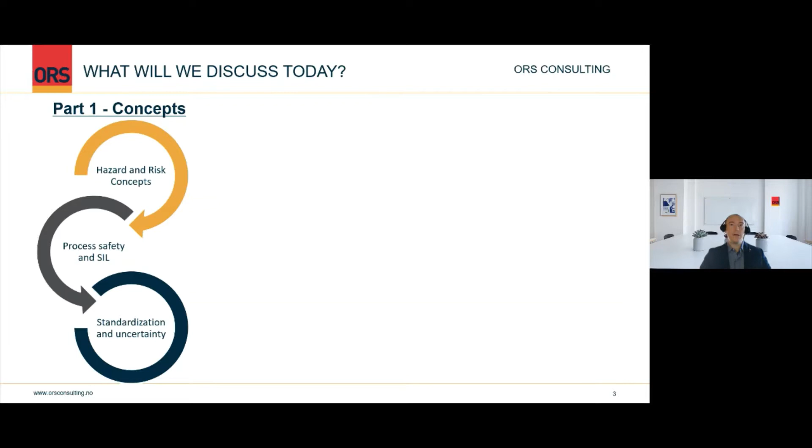First, I'll give you a short introduction about what we will discuss today. We've split our presentation into two parts, where the first part is a brief introduction to the concepts and foundations that our second part is based upon. It's important that we give you a short introduction to hazard and risk concepts, process safety and SIL, and standardization and uncertainty as we understand it, before we go into part two, which covers some of our viewpoints regarding process safety and SIL. As you probably know, process safety and SIL are very wide fields, so it's not our intention to discuss very detailed aspects, but rather present an informal overview of some important aspects to keep in mind when working in these areas.

Hopefully the majority of these concepts will most likely be known to or implicitly understood by most of you already, but we still hope that what we present today might at least inspire some thought and discussion.

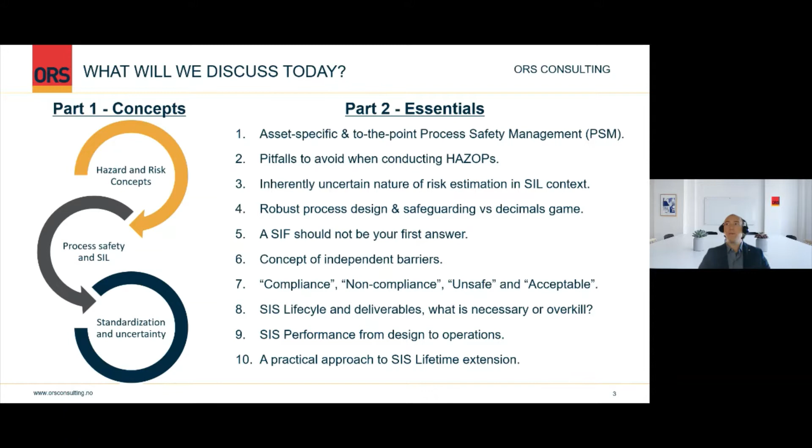So the first introduction is to risk and hazard concepts. As you probably all know, a hazard is a situation that poses a level of threat to life, environment, or asset. We're here talking about hazard and risk from an engineering and asset operational viewpoint, where risks and hazards are related to events of a certain magnitude, and risk is something you want to minimize as much as possible before you start to manage the residual risk.

A risk is defined as the probability that a hazard will turn into an accident. The traditional way of describing risk is you have a hazard with a certain consequence, combined with the probability of that event happening. This is a bit limiting for the ability to understand, administer, and manage activities and assets, because there is an important aspect related to this, which is the associated uncertainty.

All your analyses are based on certain assumptions and inputs, and if you don't understand the uncertainty related to these assumptions, your risk picture will not be correct. Based on that, we think risk should be defined as the consequences of an activity combined with the associated uncertainty of that. Another important aspect to understand is that risk can be reduced or managed, but you cannot eliminate it totally.

You'll always have some residual risk.

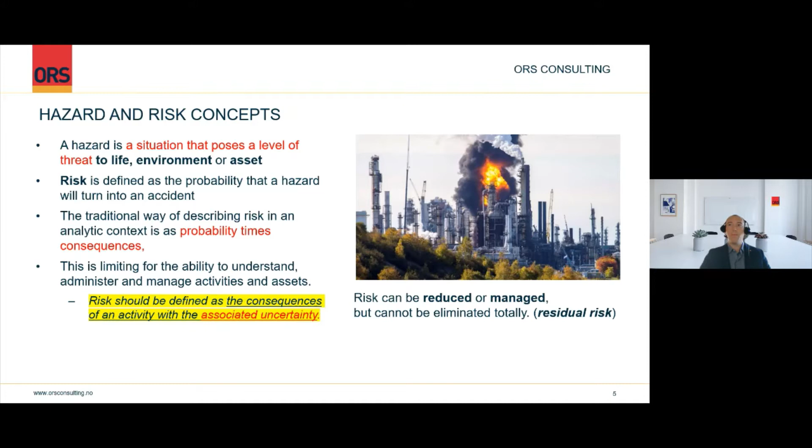So I would like to continue on the topic of managing technical and industrial risk. On a very high level and basic introductory level, we are talking about three pillars of industrial and technical risk management. To start with, we are talking about safety barriers for a process facility and a safety critical complex facility. You need to have your safety barriers in place. This is rule number one, and this is not open to discussion. For safe and reliable asset operations, you need to have your barriers.

On top of that, you will have to exercise whatever you can within the area of probabilistic assessments. You need to use data, methods, statistical tools, and other things to understand what hazards are credible and what hazards are not credible for the asset in question. This is to complement the barrier configuration. One of the key things to remember is that the probabilistic aspects are not used to eliminate robust safety barriers. It is rather in place to understand what is necessary in addition to make these barriers even more robust for safe operations. So it is very important to understand the probabilistic aspects together with the barriers.

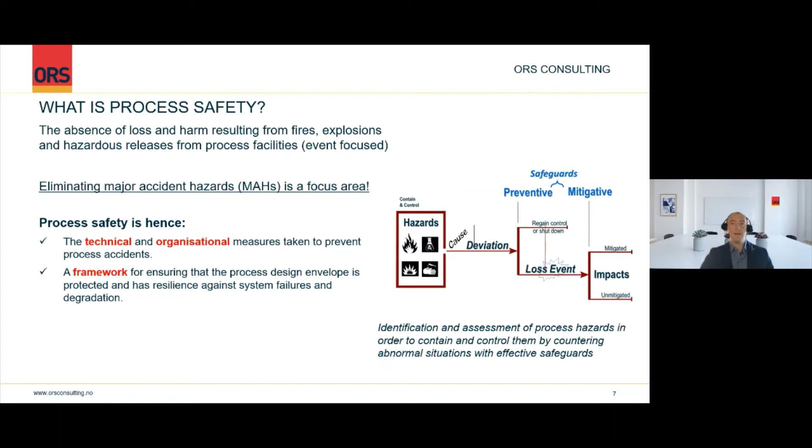This brings us to the first key principle of process safety, which is that no single failure, either operational or equipment related, shall lead to any unacceptable hazardous situations for either personnel, environment, or asset.

As Baris mentioned earlier, there is a barrier versus probability approach to safety. But in process safety, these approaches need to be combined because you can't design a 100% foolproof design. You need to use some engineering judgment to actually assess the probability aspect of how likely is a hazard or how likely is a consequence.

But based on this combination of probabilistic and prescriptive risk assessment, there are some important principles from high-risk industries that are important within process safety. Namely that barriers against process hazard shall be independent of and in addition to the control system. So this leads to the no single failure principle, that if you have a failure in your control system, you should have an independent barrier, so you don't have one single failure leading to a loss event.

And the other important aspect from these high-risk industries is that there should be 2 levels of protection against any process hazard. It's not sufficient with one barrier. You should have 2 levels of protection that shall be independent of each other and preferably of different technology. This adds robustness to the design.

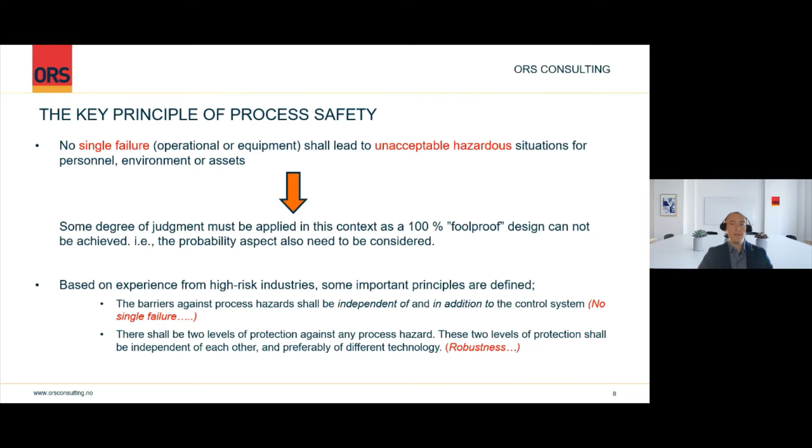So the framework for a process safety management system is founded on the general laws and more specific regulations that are relevant for the location of your asset or your operation. In addition, there are standards made by various entities that ensure that best practice is formalized. So this is kind of the framework that you are supposed to make your process safety management system within: the laws, regulations, and the best practice standards.

Within this framework, an evolving process safety management system should go from a pure standards-based approach, where you blindly implement the standards without fully analyzing or understanding the context of why you designed it this way, to a more compliance-based system where the context is understood based on your facility being custom-made and complex, with its own operating envelope and its own specific hazards.

Of course, a good process safety management system needs to take into account both the asset operational and asset lifetime related aspects, and hence you need to ensure that you have continuous improvement based on both operational experience from your own plant and operational experience from similar plants within the industry.

But finally, as we have discussed, there is this probabilistic aspect to take into account. So a good process safety management system needs to be based on the actual risks that you have on your site. And the question should always be, how can I better manage the inherent risks and ensure that they are as low as reasonably practicable?

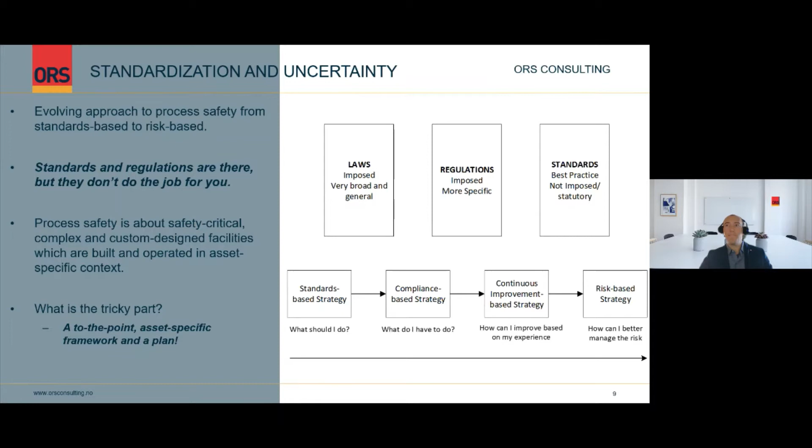Thank you, Thomas. So, it will be interesting to discuss the SIL part and the functional safety part. Now that you have explained the process safety definition and the fundamental principles, the next question is, where does the SIL functional safety fit into this picture?

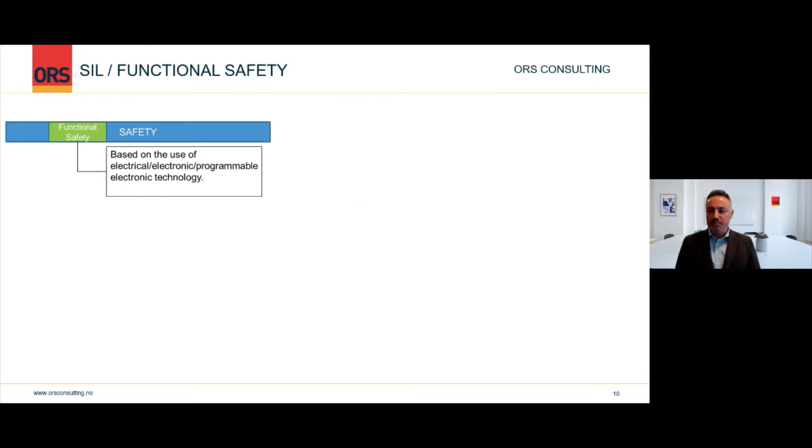So basically, in the process safety context, it is fair to consider that SIL is a subset part of process safety, which is based on electrical, electronic, and programmable technology. So we are talking about safety instrumented functions.

Remember, we refer to a function which consists of a sensor, for instance, a switch or a transmitter, and it consists of a logic solver, for instance, a PLC or a hardwired system, and it will consist of a final element. To give you an example, it could be a shutdown valve. So these functions, safety instrumented functions, they are a part of process safety.

And from now on, so when we discuss process safety, please remember that it also includes the safety instrumented functions.

So the theory about it and how it is going to be done, it is all established. I think in the last 15-20 years, we have seen that the different process industries and other industries have learned how to deal with SIL things. But these are very broad standards. For instance, when we talk about IEC standards, there are thousands of things to comply with, especially IEC 61508, which is the generic standard.

It refers to IEC 61511. It is the process industry guidance for the standard. So it is not very easy to understand what is a suitable level of working for you and your asset.

And for this kind of functions, we are talking about 4 SIL levels. So SIL 1, 2, 3, and 4, with 4 being the highest SIL level, but it is like next to impossible to see SIL 4 functions in the process industry. To illustrate for you, for instance, if you go to a medium-sized or a large process facility, you're gonna see that based on a thorough assessment, the majority of functions will be either no SIL rated or SIL 1.

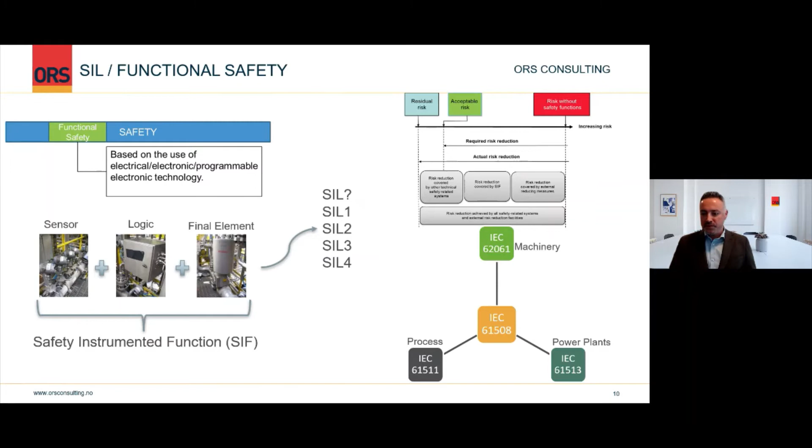So once again, we refer to process safety together with SIL from now on in this webinar. This completes the first part with the introduction to process safety and SIL basic concepts. I would like to continue with the second part, where Thomas and I will share our experiences with some essentials.

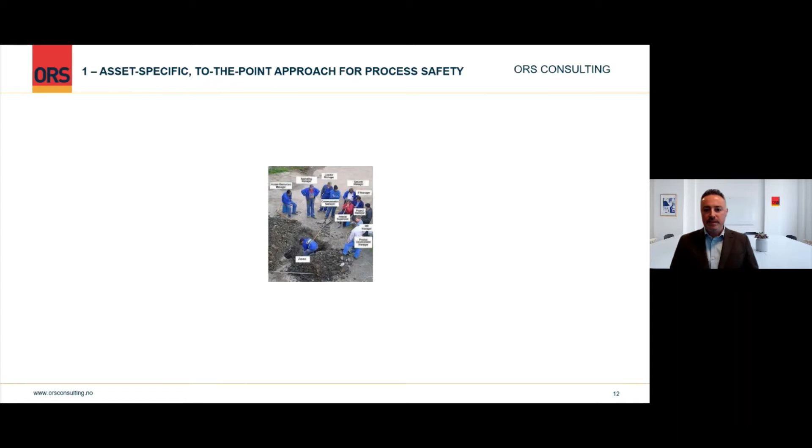The first one will be about process safety management, PSM, and this is once again our experience. Process facilities and assets are very attractive targets for mergers and acquisitions. We are talking about a steady stream of mergers, acquisitions, and divestments, and it causes reorganizations for these kinds of safety-critical assets.

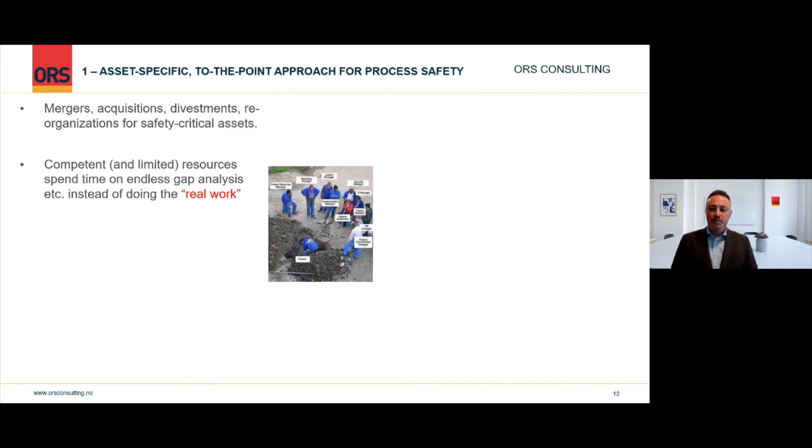What happens is that very competent but limited-in-number resources spend time on endless gap analysis, etc., instead of doing the real work, as we hear it on the site when we talk to our clients. On top of that, there are a set of other initiatives which create extra workload and distraction.

What we see is that as a risk driver for process assets and operations, lack of competence is the biggest risk driver. It is not the design, it is a lack of competence to operate. Lack of continuity due to mergers, reorganizations, and other things, and also procrastination, reluctance to implement complex process safety systems imposed by central organizations, is one of the biggest risk drivers.

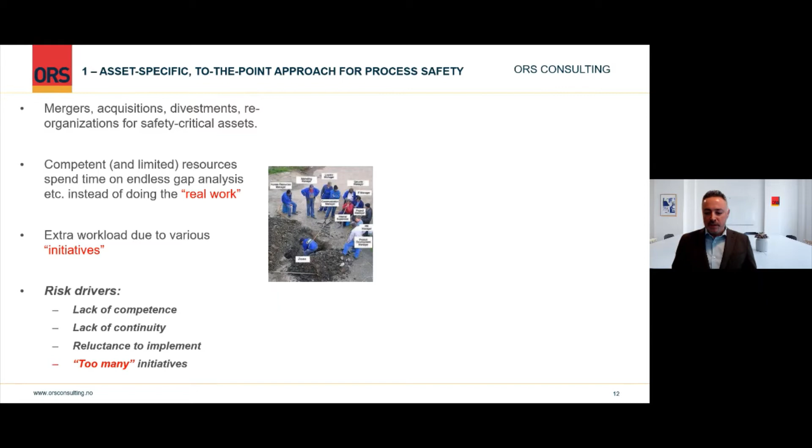It is so complex that the asset organization doesn't even bother starting. It's also worth mentioning that too many initiatives is one of the biggest risk drivers. There are so many initiatives, people don't have time, they don't even want to hear about it, so they just let it be. So what is the key point here?

Based on our experience, I think there is big value in considering the process safety management framework in a decentralized way. For instance, if there is a process asset somewhere in Europe, owned by a multinational somewhere in the United States, having a specific, to-the-point PSM framework for this asset, without gap analysis done from the central organization, would be a huge benefit so the organization isn't distracted.

Also, this asset-specific PSM framework must be very simple, extremely simple, so that you reduce the threshold for the asset organization to do something.

Another thing is the lack of continuity. We hear about reorganizations and other things, but when it comes to process safety, continuity is a must, because we are talking about assets with over 20-30,000 functional locations and components, many very complex systems. It takes many years to understand what systems we are talking about.

Process safety is not something like a learning-by-doing sport - you can't just say, 'Hey John, can you come over here and look at the compressor systems and process safeguarding?' You need to respect the people who spend 20 years understanding it, and motivate them so they can do the work. I think it is very important to think about this.

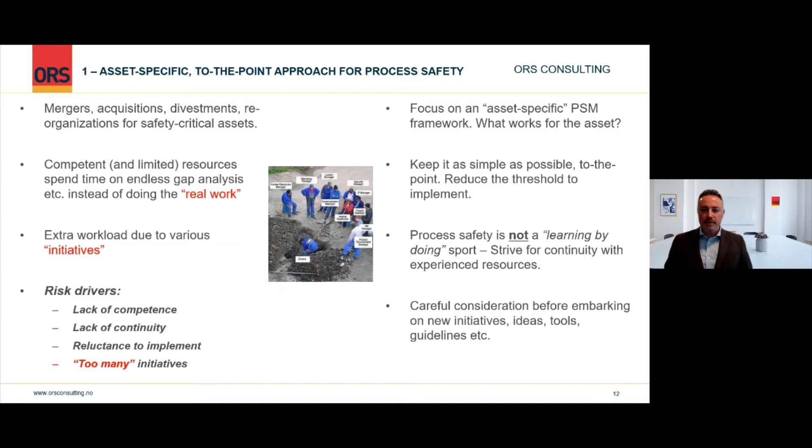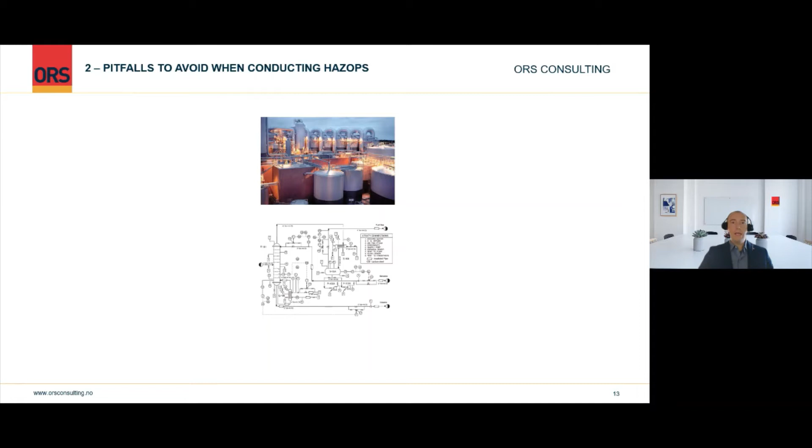Thank you, Baris. So the first step after you have a process management system in place is to identify the hazards that you have in your plant. One of the most important and well-known methods to identify process hazard analysis or process hazards is, of course, a hazard and operability analysis, which is maybe the most widely used method to identify hazards within a process design.

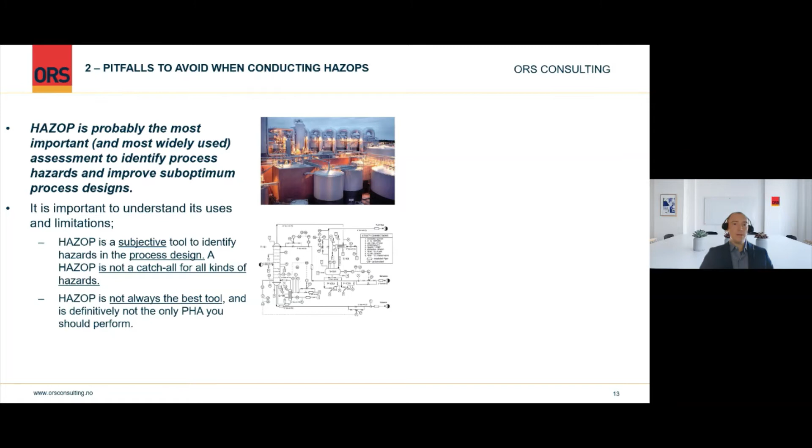Unfortunately, it's also one of the most misused analyses to identify hazards in a plant, because it is just one tool in a big toolbox, and it's important for everyone to understand that there are limitations to HAZOP. It shouldn't be used as a catch-all for all kinds of hazards, as it is based on a process design as identified on piping and instrumentation diagrams, P&IDs, cause and effect diagrams, and so on. So it is used, or should be used, mostly for identifying hazards related to your process, how you operate your process, and how the process can deviate from the design intent. It's not necessarily the best tool to identify leak sources or causes of fires or ATEX zones.

It's also important to understand that it's a subjective tool. It's based on the experience of the team that participates in the HAZOP. Of course, you need to make a team that has as broad experience as possible, but I think it's been proved several times that if you take two HAZOP teams and make them do a HAZOP of the exact same design, there will not be 100% overlap of the identified causes, nor even how they actually assess the consequences of these causes. So it's important to understand that a HAZOP will be a subjective analysis, and that you will not be able to identify all kinds of hazards through just a HAZOP.

So you should use other analyses as well when assessing the hazards at your plant. There are probably as many good recommendations for how to perform a HAZOP as there are HAZOP facilitators or people that have been part of HAZOPs. So I won't spend too much time now on giving guidance of how to ensure a good HAZOP, except I would like to say that in my viewpoint, the most important thing to actually ensure a good and successful HAZOP is to make sure that both the HAZOP team and also the organization undertaking the HAZOP understand these limitations of a HAZOP. So you don't expect the HAZOP to cover too much. Then you will just end up, best case, with too many actions because you can't assess everything through a HAZOP, or worst case, if you only do a HAZOP, you will end up with a design that has not considered all credible causes of hazard in sufficient detail.

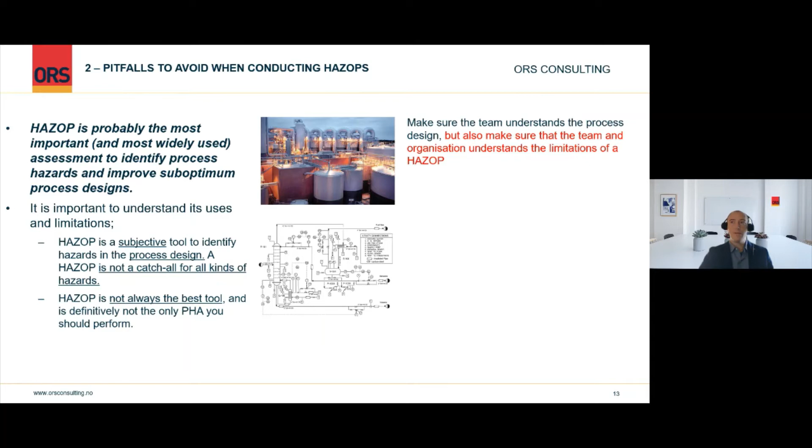As we have already discussed in some of our slides, risk as a concept must take into account uncertainty. This is valid generally when you assess a risk, but our experience is that specifically within functional safety, which is a discipline that is based on numbers and calculations, this uncertainty is often overlooked. But what's important to understand is that safety integrity levels are given in orders of magnitude. As Baris mentioned, you have from SIL 1 to SIL 4, and there is an order of magnitude difference between each of these SIL levels. The reason for that is to acknowledge that there are inherent uncertainties both in estimating risk and in calculating reliability of a system.

Your SIL allocation, whether you do that through the risk graph or LOPA or through other methods, is based on order of magnitude rules of thumb. So your SIL requirements will be based on order of magnitude rules and assumptions, basically. And when you calculate the achieved reliability of the barrier that you have designed, it's also important to understand that that is just a theoretical, uncertain calculation.

Your component failure data will not be exact. It will be based on either SIL certificates, which again is based on an FMEDA with theoretical calculations or lab tests, or worst case, you might base your calculated PFD on generic data, or even better, if you have similar plants, you can base it on prior use from a plant with similar application and environmental and operational considerations or conditions. But it's still just a figure that you calculate based on certain inputs that are uncertain and that you need to verify later.

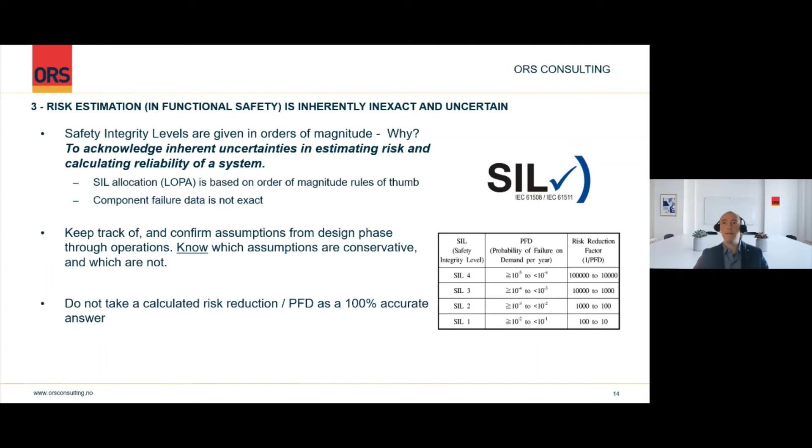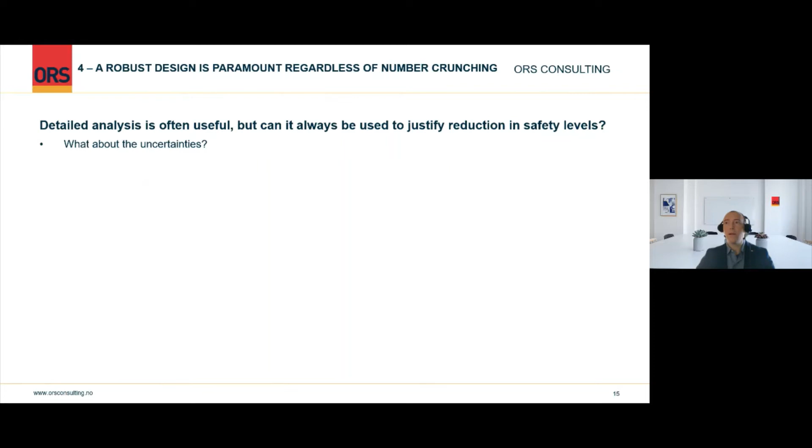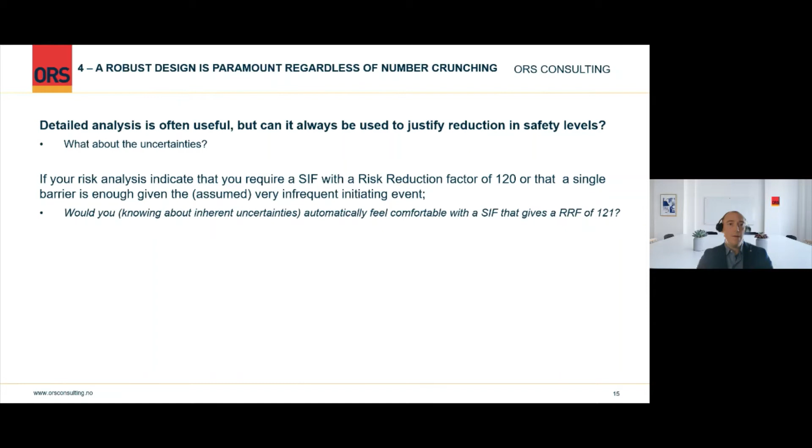Based on that inherent uncertainty, any calculated risk should be taken with at least a grain of salt, and you shouldn't design your barriers blindly based on a calculated risk or a calculated risk reduction. Detailed analysis can often be useful, but it can't always be used to justify a reduction in safety levels, because if you calculate your achieved PFD to a more detailed level, but haven't done anything about the uncertainties, that won't help you at all.

What's important here is to highlight that you need robustness in your barriers. For example, if your risk analysis shows you need a safety instrumented function with a risk reduction factor of 120, or that you need only a single barrier given an assumed very infrequent initiating event, it's not necessarily correct to just feel comfortable with a function that gives you a risk reduction factor of 121.

There's no yes or no answer, it kind of depends - on how certain you are about the assumptions and uncertainties inherent in both your requirements or the SIL allocation, and inherent in your calculated or theoretically achieved PFD. That's kind of why API RP 14C and ISO 10418 have this requirement for two independent barriers - it's to acknowledge that there are inherent uncertainties in any calculated or theoretical risk reduction.

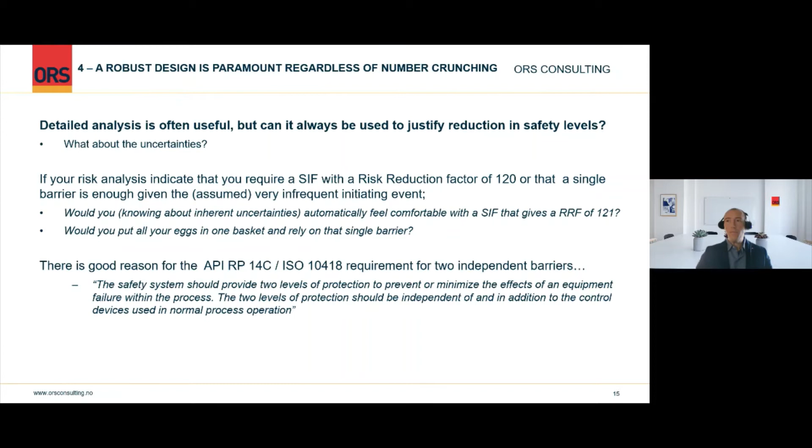So based on that, when we're talking about functional safety, it's easy to use a safety instrumented function as a barrier that you put in place if you want to achieve a measurable or calculated risk reduction. Functional safety is related to numbers and calculating PFDs, so it's kind of easy, or at least assumed easy, to show an achieved risk reduction by using a safety instrumented function.

But that's not the correct approach, because there's a hierarchy in how to reduce risks - it's better to eliminate a risk than to prevent it. So every time you see someone designing a SIF as the first answer against any process hazard, you should know that's not the best approach. The best approach is to eliminate the risk directly with an inherently safer design, or to design a passive safeguard with fewer moving parts and assumed better reliability and robustness.

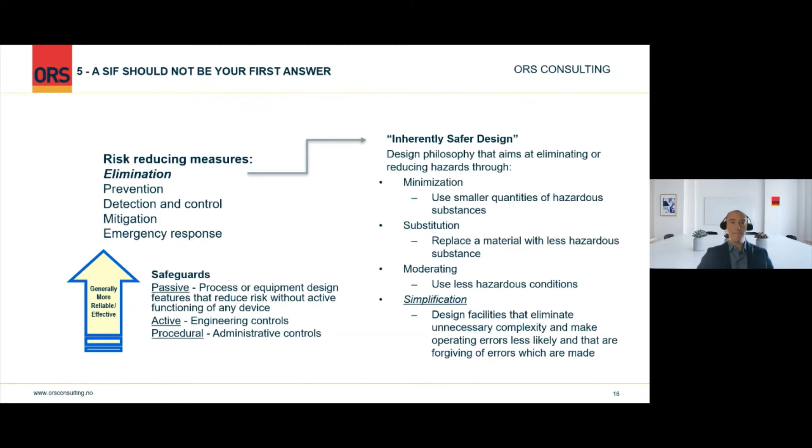This robustness and this uncertainty moves us to our next concept, the concept of independent barriers. As some of you know, the API 521 standard regarding pressure relief operates with a double jeopardy principle. Unfortunately, this principle is sometimes misused and taken to apply for process design in general - a misuse that leads to less robust designs.

As I mentioned, process safety should combine a barrier approach with a probabilistic approach, because you have these inherent uncertainties in your analyses. You should still have barriers in place that are independent of your initiating causes. Compounding this problem is that for most of your barriers, you don't really know whether they work or not until you have an event where they are called upon.

Of course, that's why you test your barriers, with function tests and proof tests, but they are seldom tested under the exact same conditions as would be seen in an actual event.

What we often see is that the double jeopardy principle is misused by saying that, for example, if you have an initiating cause and one barrier, having the initiating cause and failure of the barrier simultaneously would be double jeopardy. But that's not necessarily the case, because you don't really know that your barrier is working until you have an event that actually calls upon that barrier.

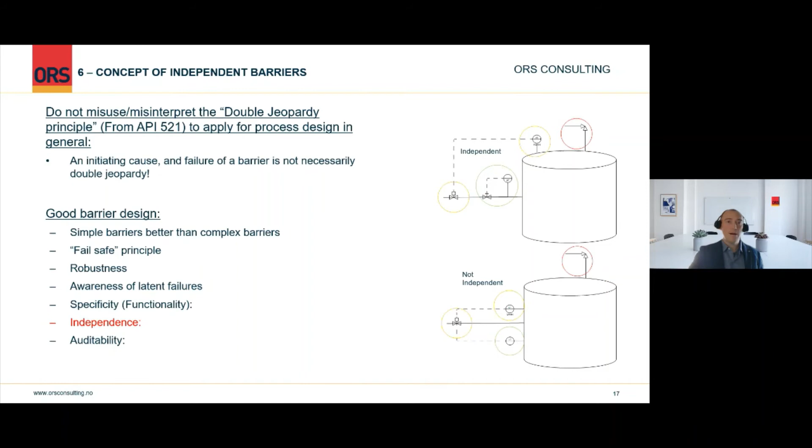This is an example of a non-independent system, where your initiating cause is not independent from your first barrier. This is a design that would not be acceptable from a purely prescriptive approach, ISO 10418 or API 14C, but it might be acceptable from a pure probability-related approach. This is why it's important to combine these approaches, to make sure your design is robust and your barriers are good enough for your specific assets.

From these previous slides, it should hopefully be clear that we're talking about concepts of compliance and non-compliance with prescriptive standards, and what is unsafe versus what is acceptable from a probabilistic approach. Especially within functional safety, the IEC 61508 and 61511 standards are very large, with very detailed requirements, and they're promoted in the process industry as benchmark examples of good practice.

But it's important to remember that the legal obligation is not to follow these standards to the letter. The legal obligation is to manage risk to as low as reasonably practicable, and these standards are just a benchmark example of how to do that, and should be treated as such. 100% compliance with all requirements in any of these standards is really not practicable in the real world, or it might be practicable, but it requires extensive work. Working towards full compliance is a game of diminishing returns, because you approach full compliance asymptotically.

The Pareto principle applies here as well. You might achieve the largest risk reduction from the first effort you put in, and putting even more effort in won't give you that much more risk reduction. So it's always easy for an expert to find non-compliance with these standards for any system. But unless that non-compliance can be shown to actually compromise safety, it doesn't really need to be a case of concern, because as long as you've reduced your risk to as low as reasonably practicable, you've met your legal obligations.

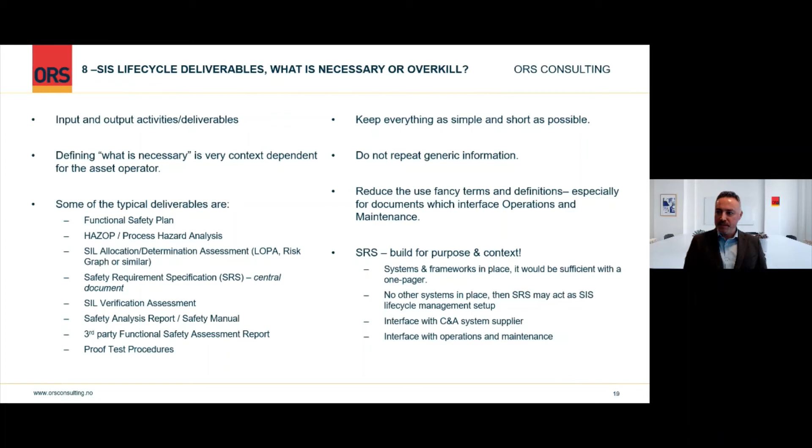I would like to discuss SIS performance, and it goes from design to operations. The SIS lifecycle approach is very important. I think it's extremely important to understand the context with IEC, because back in the time, before IEC, you had a good transmitter, a good valve, and a good safety system. It was a good function.

So the aspects of IEC which are important to realize is that it is performance-based. It always talks about performance, and it is risk-based. If you don't understand risk and performance correctly, it's not gonna work.

So as soon as we are talking about risk, we are also talking about assumptions. Everything is based on assumptions - the original design premises with hazard scenario, initiating causes, protection layers in place, risk adjusting factors, what kind of demand mode or rate, which is theoretical. So whatever we tell you, if you have a SIL2 or SIL3 function, it's based on tens of assumptions for each function. On top of that, there are more assumptions or simplified methodologies coming into picture when we verify that everything is good.

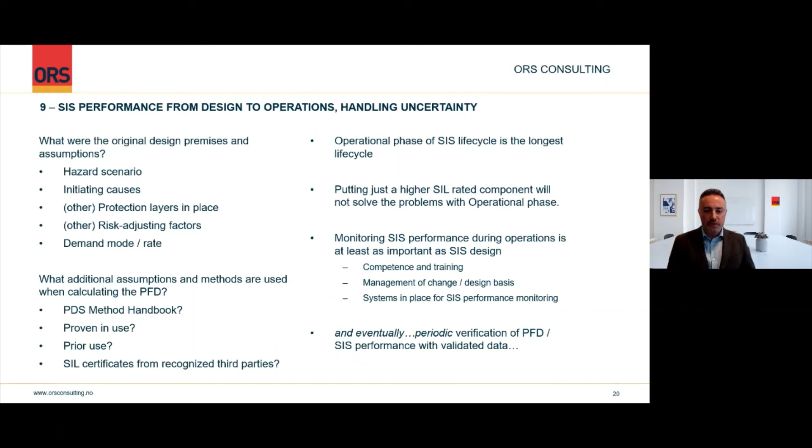Very quickly, I would like to round up with the lifetime extension methods, and I'm going to share a very strictly kept secret: the components have a lifetime. They also have a useful lifetime, and it's a very particular concern because, as stated in the IEC standards, the results from the probabilistic calculations are meaningless, and the probability of failure significantly increases over time. The suppliers say the same thing, we say the same thing, and IEC says the same thing, but you don't agree. Okay, that's fine.

But what I can tell you is that things fail. You don't hear about it. Maybe you've got a couple of components in your asset - talk to the suppliers, they will tell you things fail. When they age, they fail. So what I would like to share with you, based on our experience, is that if you turn a blind eye on the problem, it's not going to solve the problem with the aging components.

If you show ownership for useful lifetime matters, and develop a practical approach - like how are you going to screen the SIF loops, what's more critical, what kind of modification projects are coming in your pipeline - this will be very useful, if you do it from a cost-benefit and criticality perspective. Also, instead of trying to get too much at once, think limited: set up practical and achievable goals. I think this will increase the overall safety and reliability level for your process safety.

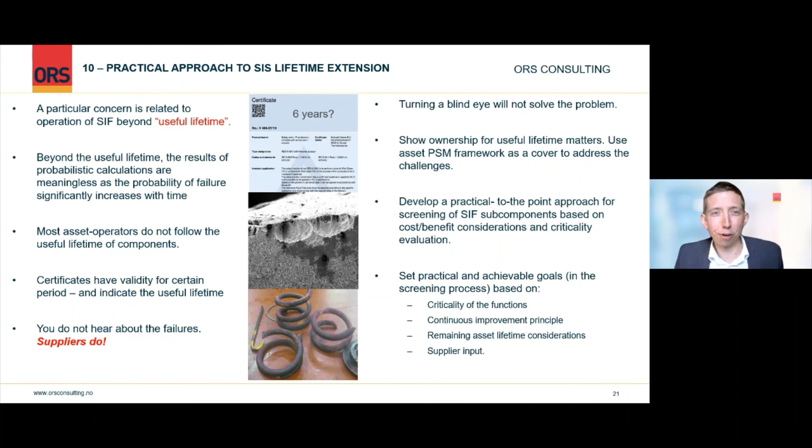We have time for some questions now, and we can start with a question from Sandri. I think this one will be for you, Thomas. It's regarding re-HAZOPs of operating plants. Is it a valid technique? How often is it recommended to do? And does it make sense to have the technology licensor together in the re-HAZOP session? Thomas, do you have any input?

Yeah, I think it's a valid technique based on the assumption that your last HAZOP was the final HAZOP based on the theoretical design. Through the design phase, you had some assumptions about how the plant were going to be operated and how your systems were going to be maintained. After you've gained operational experience, I think a re-HAZOP is a good way to actually assess whether your plant is operated as it was intended to be operated.

Based on that, I think you should at least not do it more frequently than you have new operational information about your plant. It depends also on where you are. Some countries have a legal requirement to do this every 5 years, which may or may not make sense depending on the level of modifications and changes on your plant. But at least having a re-HAZOP after you've operated the plant for a certain number of years is a very good idea to confirm that your plant is operated as intended, and to confirm that you haven't overridden or inhibited any barriers that are critical from an engineering theoretical perspective.